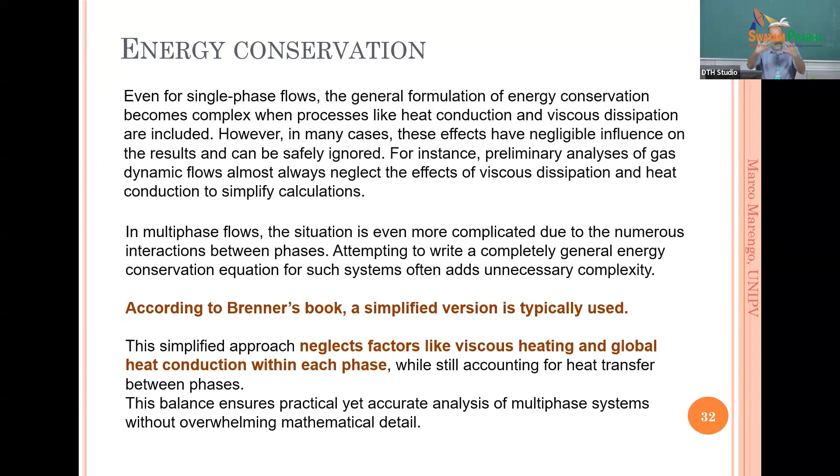So, when we have evaporation or condensation, this means that when we have evaporation, we are going to transport energy from one component to the other one, right? Because we have a mass. We transport momentum, but we transport also energy. So things are fine, but we should also consider other factors, because we talked about the viscous dissipation.

So one component is acting and producing shear stresses on the other component. But this viscous dissipation means also viscous heating. Okay? This is becoming complex. Or we may have heat conduction from one component, from one phase to the other. Okay, so we have heat transfer from one phase to the other.

It's not like what we wrote before, that we have a heat flux coming from, let's say, the walls, like in the single phase. But here, bubbles may have a different temperature with respect to the liquid, or the droplets may have a different temperature with respect to the gas, and so on.

Imagine, for example, having a spray of a liquid at, let's say, 40 degrees, 50 degrees, inside air at 20 degrees. So we have transport of mass, we have a mass interaction term, and we have energy because of the difference of temperature. Okay? So things are becoming, again, complicated because we have different conditions.

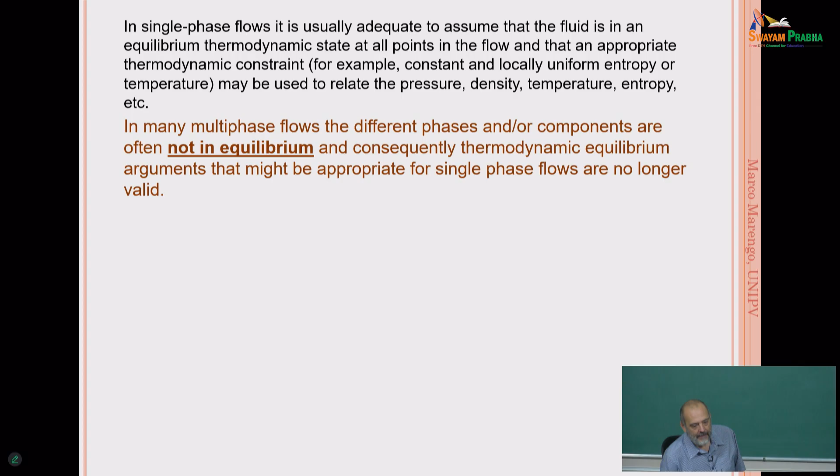So another point that is very important to say, and this answers one of the questions during the break, is: pay attention that the system is not in equilibrium anymore. So we are stretching the assumption that the system should be in equilibrium. Imagine having boiling, okay? Or a phase change in general.

So you have boiling, and you are considering the system at a given pressure. Yeah, but locally, in time, the pressure is not the pressure of the system. It's changing because of the boiling itself. So in fact, what is happening is that the system itself, locally and instantaneously, is not in equilibrium.

We are stretching the properties in a way that, we need to define the pressure, fine, so we put the pressure. But in fact, it's quite complex, and it becomes even more complex if you would like, for example, to simulate phenomena like flash atomization, as I said yesterday, with negative pressure and so on. So it's becoming really complex, what is happening.

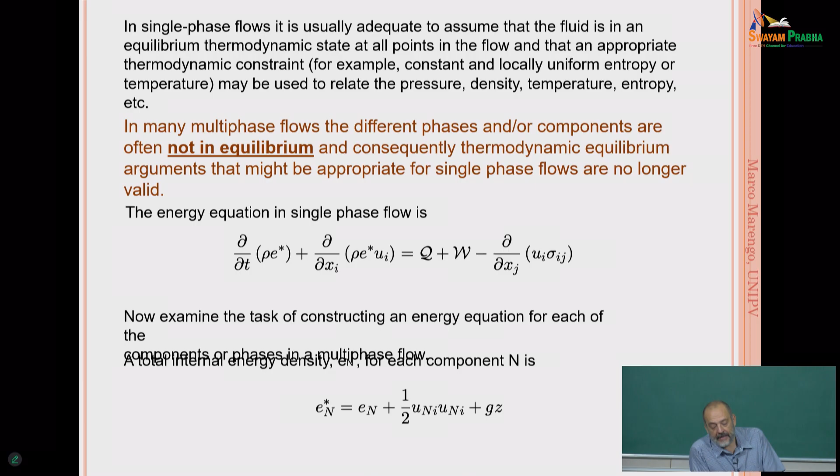So if you look at the energy equation in a single phase, this is what we have done before. Okay? So first of all, we need to write this equation for when we have different components. In the case of different components, we have a component n. We can write the total energy, of course, with the subscript n. That is, we can write this equation for the component n.

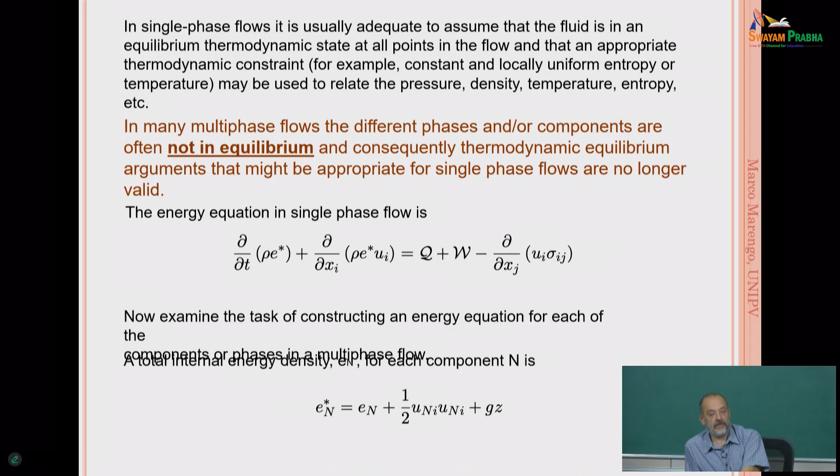Until now, it's fine. Which kind of energy equation do we need to write? Okay, so in words, and then we need to translate into mathematics. We have the rate of heat addition to n from outside the control volume, what we have done before. So we have a wall that is heating the liquid or the gas, or both. In this case n is one of the phases. Then we have the rate of work done to n by the exterior surroundings. Gravity, external forces, fine, no problem.

Rate of heat transfer to n within the control volume. This is becoming a little bit more complex because it depends on the other phases. Plus the rate of work, not heat anymore, done to n by the other components, because we may have drag. So then this is becoming complex. And this is equal to the rate of increase of the total kinetic energy plus the net flux of the total internal energy, because of course we are going to change the condition in terms of the energy.

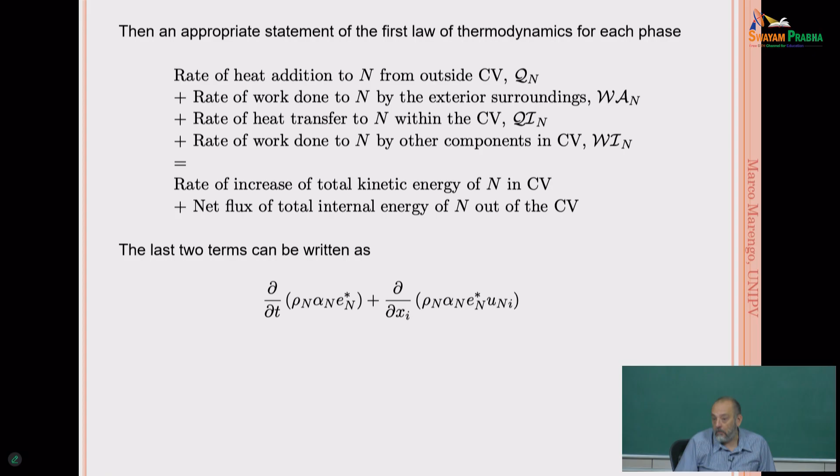So these terms are very clear. We can write the last two in this way if we consider the component n. And this is straightforward because it's the same equation that we have for the single phase, only that it is for one component. The other one is a little bit more complex. The first one is the external heating. Not difficult. It's a Q. It's a power that we are giving to the system.

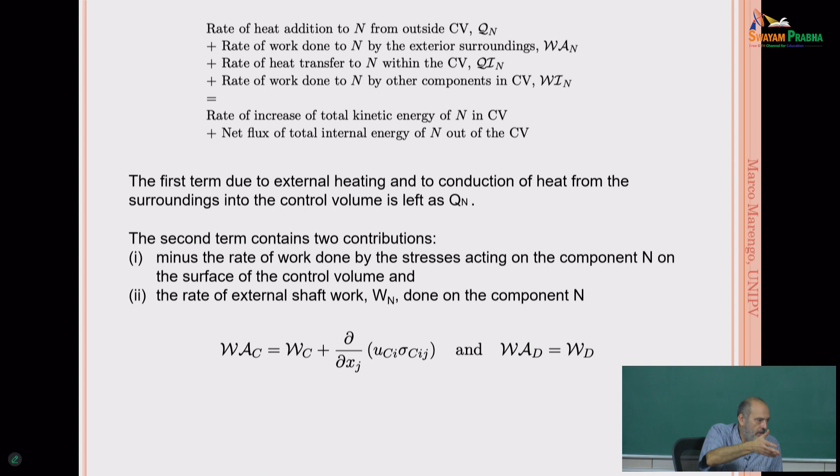The second one is the work done to n by the exterior surroundings. Yes, it's okay, but then we are going to have stresses along the component, which is fine, and maybe we have the shaft work. But again, this is classical. We have the shaft work plus the stresses, sigma. So again, it's nothing unusual. It's something that we can understand.

Then we have the three contributions that may be trickier. One is the heat that is coming because of the evaporation, boiling, condensation. So it's linked to the mass interaction term, QIN. And then we have the stress, the viscous dissipation due to the other component, and we are calling it WIN. Okay? And then we are going to have all the stresses of, let's say in this case, the

continuum phases. Okay? So, of course, again, as we have done for the mass, the sum over all the components of QIN is equal to 0, because inside the control volume, the liquid is giving energy to the gas, and vice versa, but at the end, this term must be 0. Same thing for the work, and of course, same thing for the internal exchange of energies.

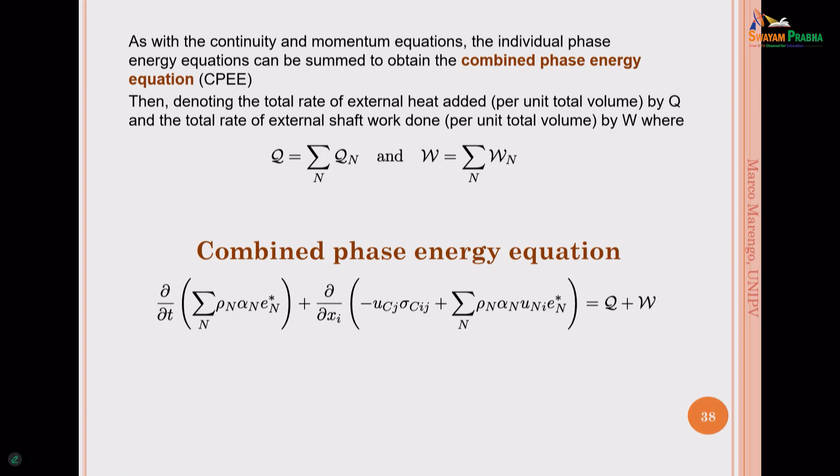If we have a two-phase system, of course, one contribution is just equal to the other one with the minus sign. So what the liquid is receiving from the gas is equal to what the gas is receiving from the liquid, and so on. So at the end, if we put all together and we sum up, we land with this combined phase energy equation, okay? Which is the equation that says how it works when having more than one component.

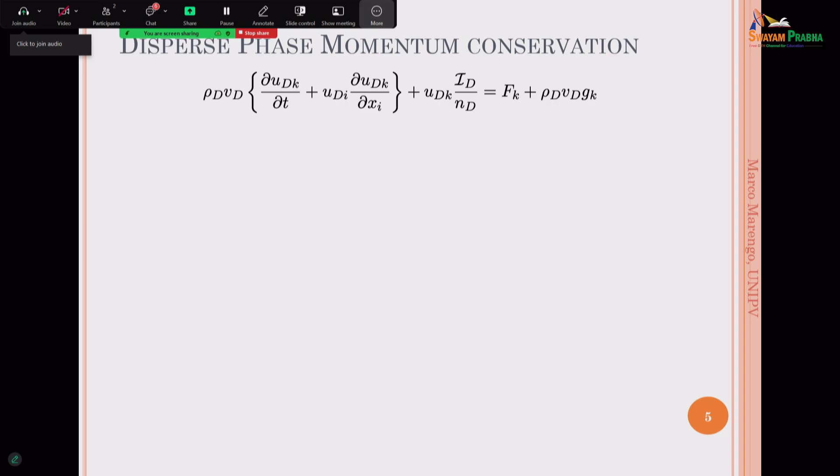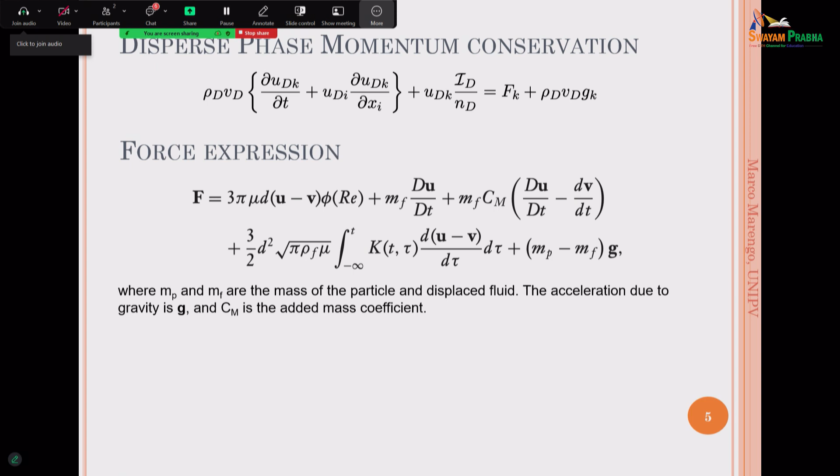Let's pass to the second, because now we need to enter a little bit more. So, look at this equation. We already said something that is very important: to define the forces, okay? Someone asked me during the break, how is the force? How is the coupling between one component and the other? This is a classical force expression, for example, when we have two components, for example, particles inside the fluid.

So, what is this? It seems complex, no? Because, of course, there are many terms that usually we don't have. You can recognize at the end the bulk force, the G, the gravity, like we have written before. So no problem. But there are other terms that are really more difficult to understand. So the first term is the Stokes drag. This is the force linked to the fact that we have a drag inside, as we have seen before. For example, this is a drag felt by solid particles inside the gas or the liquid, and the Stokes drag can be written in this form.

It's 3 pi mu, so the viscosity, and then we have the dimension of the particle, u minus v, multiplied by a factor that can be written, for example, with this equation that is linked to the Reynolds: 1 plus 0.15 Reynolds to the power 0.687. So this is the usual form. And of course, this Stokes drag is linked to the relative velocity of a particle with respect to the flow.

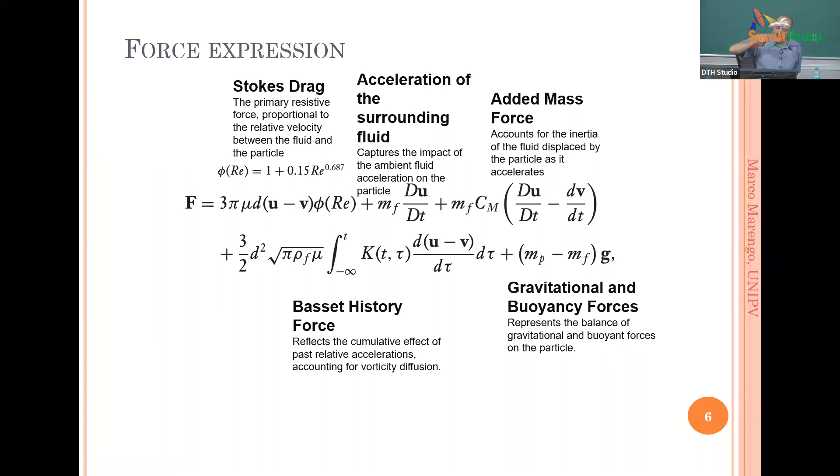And the form is that we have 3/2 d squared multiplied by the square root of rho f, the density of the fluid, multiplied by viscosity, pi. And then we have an integral from the beginning, let's say, to a given time. Then there is K(t - tau), the so-called kernel, and then there is a derivative of u minus v. So the effect is not like the du/dt before. It is the derivative in time of the relative velocity. So it's the relative velocity that is creating this kind of vortex.

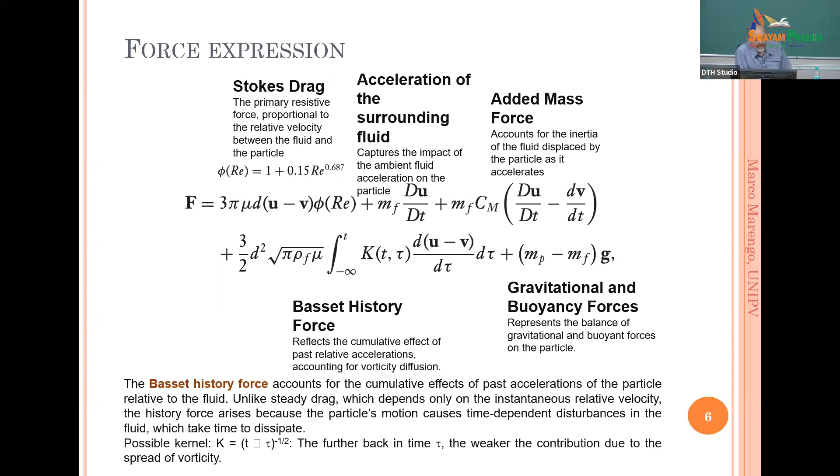One can ask, what is the difference between the Stokes and the Basset force, okay? The Stokes drag depends on the instantaneous velocity. So at a given time, you have a difference between the gas and the particle velocity, and this creates a viscous dissipation. Okay, the drag. The other one, no, because it's not depending on the instantaneous velocity. It is the acceleration with respect to the relative velocity. So you don't have u minus v, but the variation of u minus v in time that is producing the drag.

And this kernel, at t minus tau, if you are going very far back in time, becomes very weak, in the sense that if you go back a lot of time before what is happening, the influence is very low. It's important to know what is happening maybe a few seconds or milliseconds before, not what is happening 1 hour before.

So this is about the force. Now we need to understand a little bit more about the heat transfer, okay? When you are heating up a particle or a droplet or a system in general, you have a characteristic time that is linked to the conductivity or convection, but also the thermal inertia, rho Cp of the system. So this is the characteristic time of heating or cooling of a particle, a droplet, a bubble, and so on. So again, when we transfer energy from one phase to another, we can transfer energy by conduction, convection, and radiation. As I said yesterday, we are not considering radiation, okay?

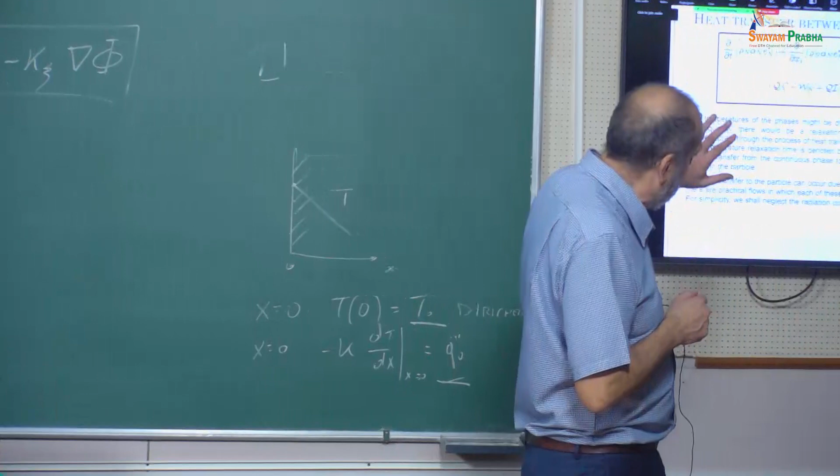Okay? It's a course. It's not 1 hour. But only to give you the idea of what is happening. So we are writing this equation for the chemical species, and we need a closure equation saying what is happening to one species with respect to the other because of the chemical reaction. So it's becoming quite complex.

If you are reading a paper with combustion simulations, you understand why maybe there is 1 page of equations. Because if you start writing all the equations in the proper way, it's really very complex. You have all the possible combinations. If the velocity of a particle with respect to the flow, so the relative velocity, is quite small, of course the dominant mechanism is conduction. Forget about radiation for now, but it's conduction.

So about radiation, one can think, okay, it's only for combustion. It's not only for combustion because, for example, imagine to have very, very hot metal particles. So you produce, let's say, a metal spray, plasma spray, and so on. So you have particles at 2000 Kelvin, something like that, entering the gas. Of course, radiation becomes important, even without a chemical reaction in this case.

The point is that radiation becomes important because, depending on the gas that we have, the gas can be transparent or almost transparent, and this means that there is a transfer from one particle to another, because in different positions you have different temperatures of the particles. Understand? So radiation there becomes very important because the temperature is very high.

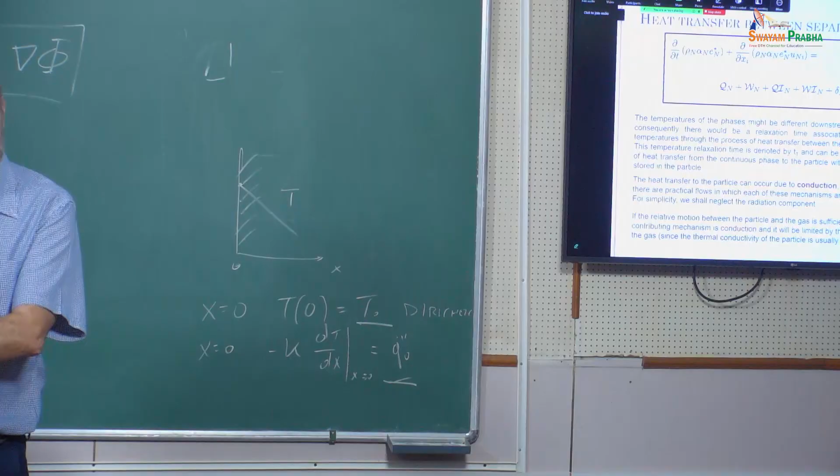Okay, only to say, because I was thinking, now I'm saying only chemical reaction, but it's not only combustion. It can be something like that also, thermal spray. Simulation of the thermal spray is considering also radiation. Now, for this, we are not considering it, because it's, again, another level, okay? And we are not considering chemical species.

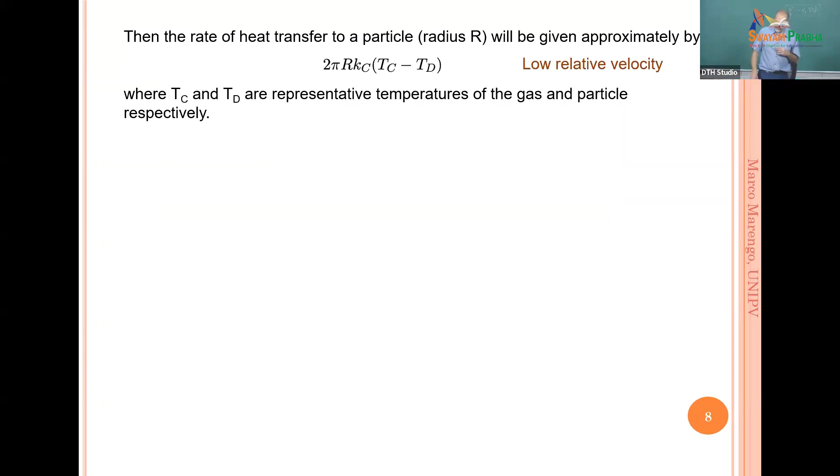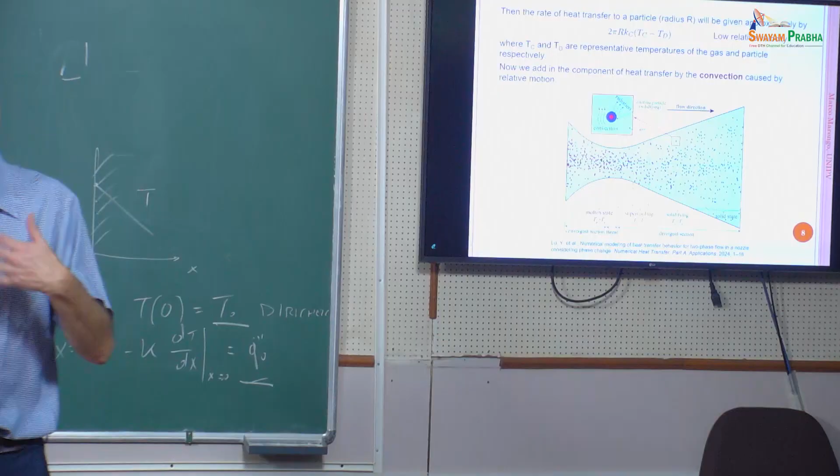But when the relative velocity is low, we can have this kind of expression that says how much is the exchange between the particle and the gas. When we have convection, things are getting complex. For example, I took this example because it's 2024, and again, multiphase flows is quite complex, and you see that we are doing research. It's a field of research. It's not something that is established and everything is fine.

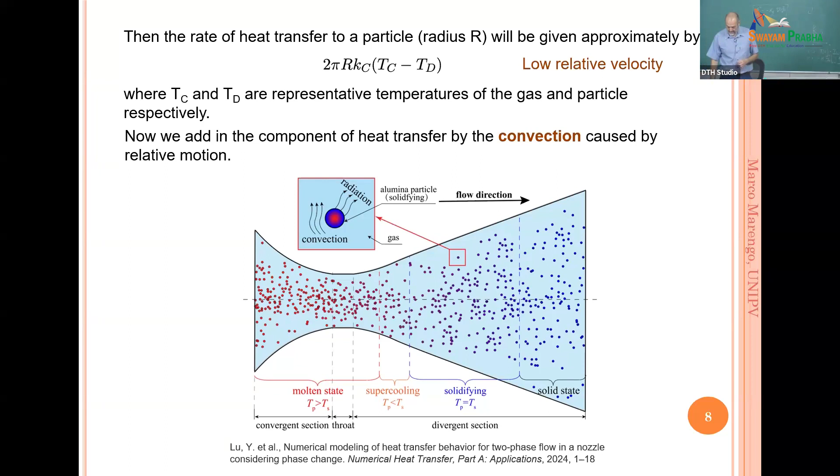So, for example, if we have a nozzle like that, and we are producing particles, and the particles are molten, are liquid metal, for example. It's going inside the nozzle like that, so convergent, divergent nozzle. So we are going to have a flow, and then we have different phase changes. We can have a solidification at the end. We are producing solid particles. And of course, in this case, we have convection and radiation. Only to tell you that it can be quite complex.

So a very simple way is to consider, for example, the interaction between the droplet and the gas, or droplet particles and the gas or a liquid. And again, we can come back with the relation that I showed you before with the Nusselt number, where the Nusselt number was a function of Reynolds and Prandtl. So we can incorporate this kind of relation in order to calculate how much is the heat that is going from one phase to another.

So the question is what we wrote before, but then we need to understand how we can calculate these relations. Again, on Thursday we are speaking about numerical methods, and I'm going to tell you how we can deal with the different aspects, because there are different ways to solve the problem. One is considering the dispersed flow, each one, for example, when we are doing a VOF simulation of a spray, okay? So we are really going to understand at the interfaces, each one, what is happening. Of course, in terms of computational time, it is very, very long, because we need to consider the single droplet.

Another way is to consider the phase of the droplets in a kind of parcel, okay? So we are putting some droplets with the same diameter together. This is another way to solve these problems, okay? Now, today I'm giving you the general overview. Then of course, we are going to write the closure equations, because we need to understand how to deal with the different terms. But this will be on Thursday.

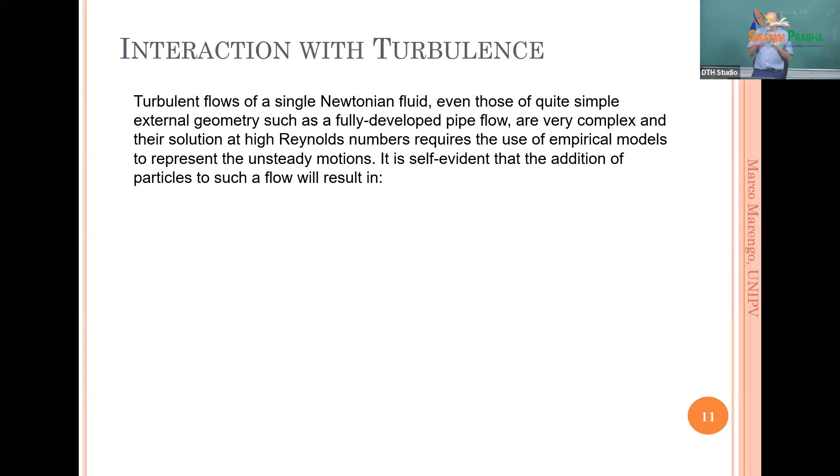Let's put away something that is too complex for this course, non-Newtonian fluids. Newtonian, okay? Viscosity is the same. Put away situations where you don't have fully developed flow, so you have a nice condition. Again, we don't want to enter into the details, okay? Good.

Because when you're dealing with complex, unsteady motions, for example, when you have a pump and you're considering variation of the rotation of the pump, so variation of the pressure and so on, you may have segregation. So the particles, like what we saw before, can create structures. We can have particles that are going to the walls and so on. Unsteady motion. Particle agglomeration, or coalescence of the droplets or the bubbles. So the droplets can coalesce, the bubbles can coalesce, and so on. So it's not changing the mass of the component, but it's changing the quantity in a given volume.

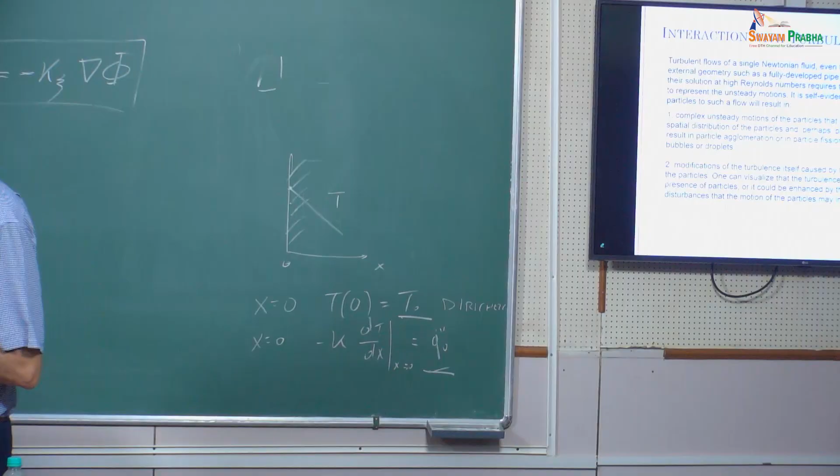Okay, so this is, of course, to consider. Okay, the particles in all the multiphase flows are having an effect on turbulence. This is the point. I said already, no? Okay. Now,

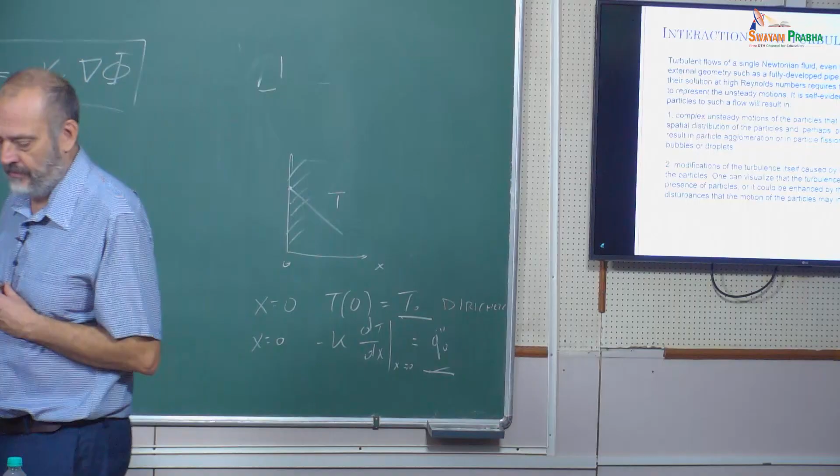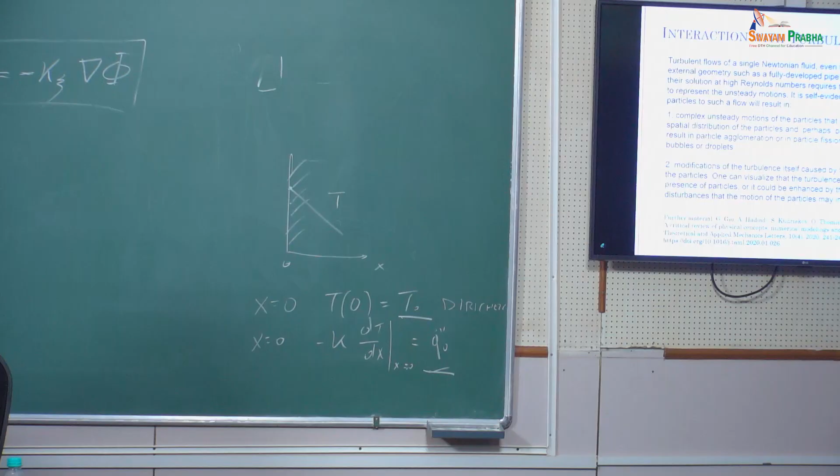if you want to study a little bit more this part, I put a paper that I enjoyed. It's particle-induced turbulence. So it's the turbulence induced by the particles. So you have a laminar flow. You put inside droplets or bubbles and so on. You are going to have local turbulence.

So you have a nice flow. But you put bubbles inside, like even a slug plug condition, like in a pipe. So you have bubbles going, everything is laminar. Wow, it's very good. Yeah, but behind the bubbles you have a wake. The wake is producing a vortex, and you may have a kind of turbulent situation. So then, of course, there is an influence.

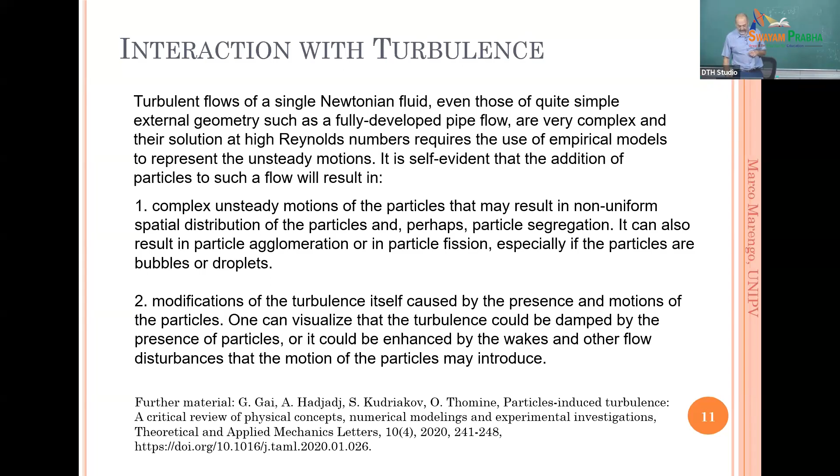Okay, so this is a critical review of physical concepts, numerical modeling, and experimental investigation. It's 2020, so it's quite recent.

So imagine a spray. So you are injecting a spray, and you have gas that is going to be entrained in the spray, because the velocity is higher here, so the pressure is lower, so you have gas from the environment that is going inside, and then you are creating vortices inside, even if the air was completely still at the beginning. So, completely still, we are injecting the sprays, we are completely changing the motion with a lot of vortices, so we are creating turbulence.

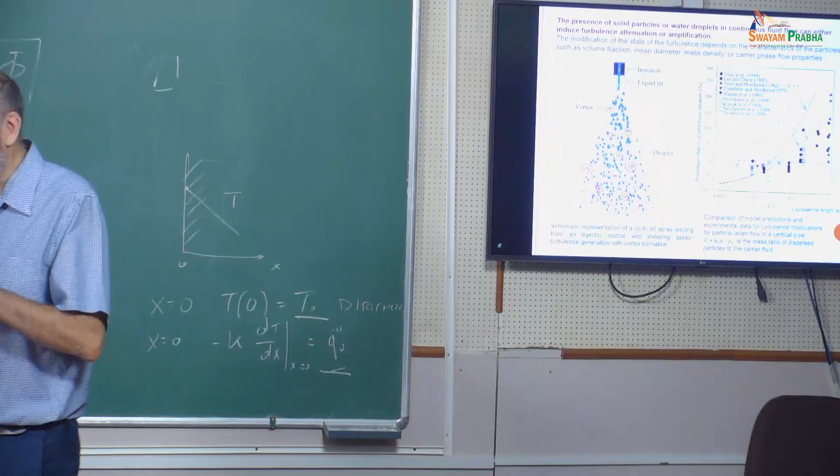And the turbulence can even, let's say, at the beginning, if it's completely unsteady, create a situation where we can change the condition of the spray, or let's say of the atomization.

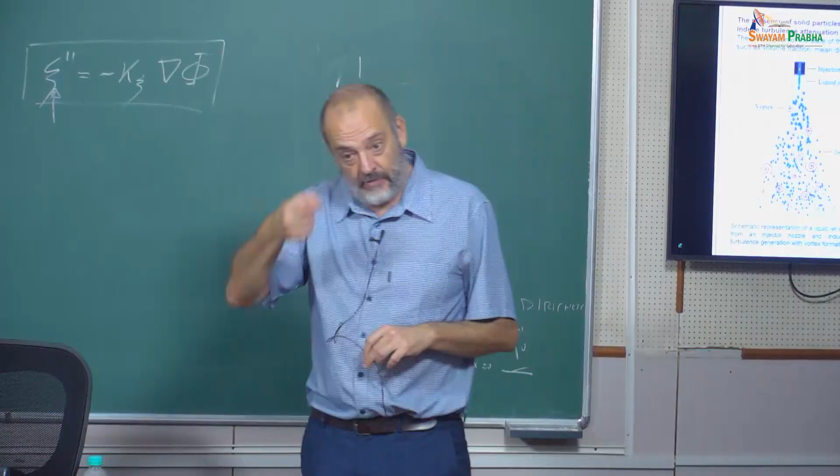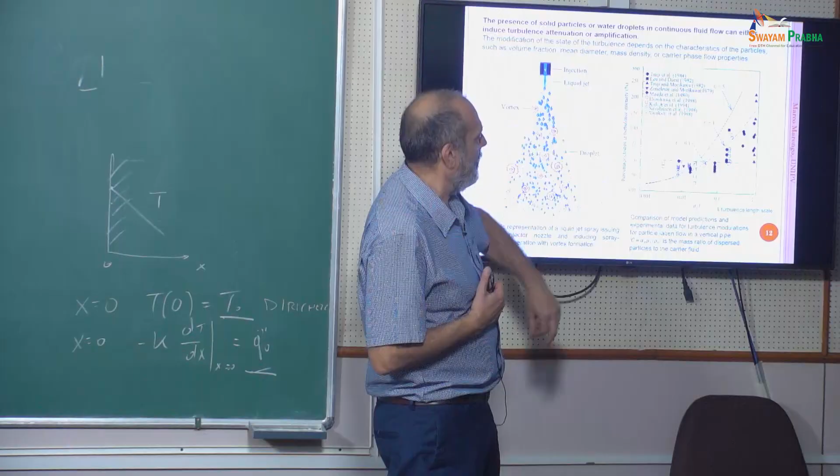And for example, if you look at the second result here, that is in the paper that I cited, this is the dimension of the particle with respect to the turbulence length scale, the lambda, no? And here is the percentage change in turbulence intensity, okay? So, as a function of alpha p rho p over rho f.

And as you can see, there are different data that are a little bit scattered. So this means that even with experiments, it's not clear what is happening. It's very complex. But it's very clear that we have an influence. And the influence also depends on the dimension of the particles.

And even think about the fact that if the particles are not spherical, it's even more complex because we also have rotational mechanisms. So, for example, if we have sticks, strands, and so on, these strands can evolve, and then, of course, they can completely change the local turbulence again. So the system can be quite complex.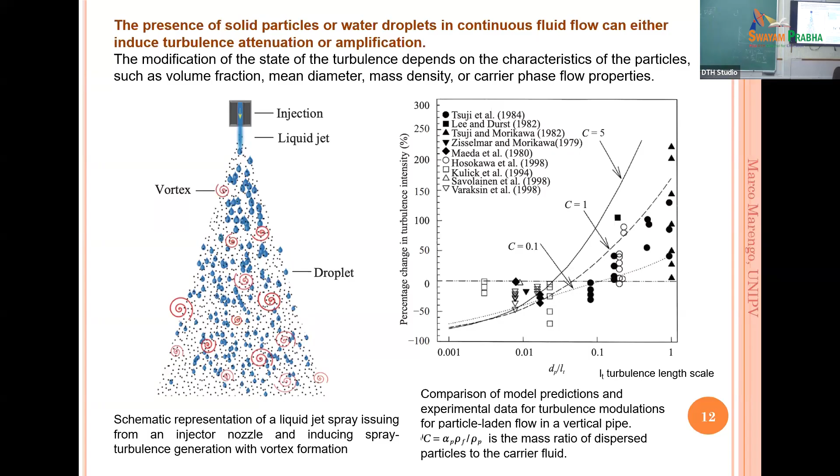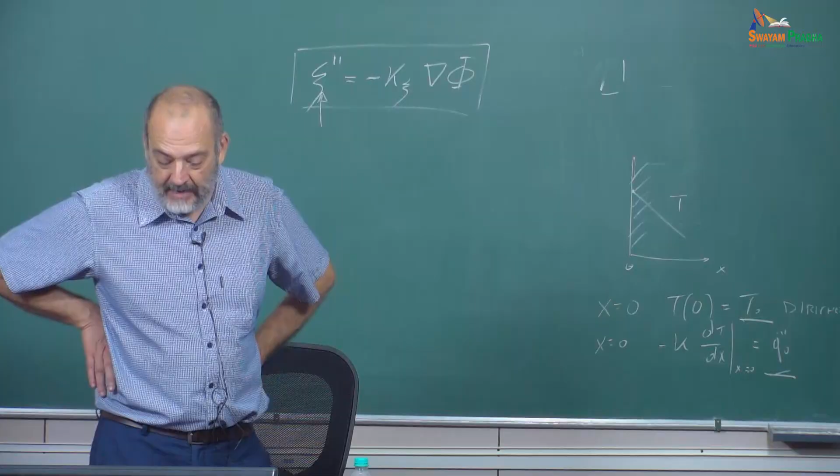So there are 5 key factors that are, let's say, explaining what is happening. One is the so-called surface effects. It's the particle size normalized by a length scale. So this dp over lt. Then we have inertial effects. So we have the different velocities for the particle and the continuous flow.

We have the response time, the particle response time, or the so-called Stokes number. Maybe I can say something later on. Which is also very important, because it's the response to a change of the flow velocity, so the acceleration. Loading effect, how much is the quantity of particles inside, and the interaction effect, because we also have particle-particle collisions, and we have particle-wall, and so on.

Okay. LT is the turbulence length scale that can be written in terms of K and epsilon. And this is quite useful because, of course, K-epsilon, for example, is a classical model to describe turbulence in numerics, so we can use these values. Where K is the turbulent kinetic energy, and epsilon is the dissipation rate. And then there is a constant, which, for example, for the K-epsilon turbulence model is 0.09.

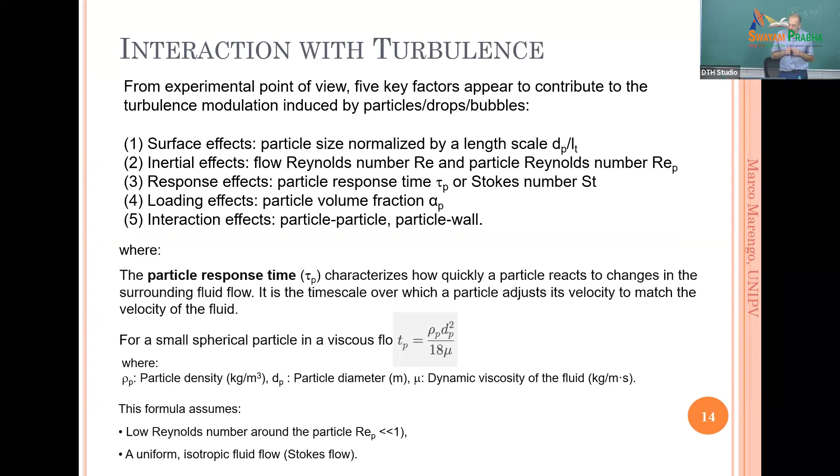The classical response time is rho of the particle, the density of the particle, multiplied by dp squared, divided by 18 times the dynamic viscosity.

Look, if we consider alpha, the volume fraction, this is an interesting graph from Elghobashi. So it's true that below a given value of the volume fraction, so when we have very few particles, very few, okay, there is no significant effect. There is an effect, but it's negligible. There is always an effect. But this effect is negligible below a given value, alpha p, okay?

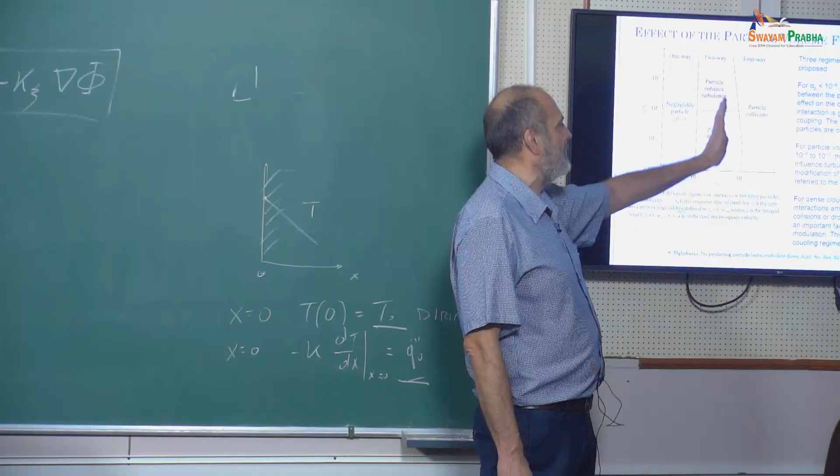After, we have a second region where we are going to have more particles inside, and we have the so-called two-way coupling regime. So, in fact, there is an influence from one component to another. However, depending on the particle response time and the turbulence time, we may have the situation where the particles are enhancing the turbulence, and the situation where they are attenuating the turbulence.

Okay, so if the response time of the particle is small, we are going to have this effect of attenuation of the vortices, because in fact the particles are following somehow the flow. Imagine that you have some turbulence and the particles are entering the vortex and following the vortex. Since you are adding a mass to the vortex, you are slowing down the effect. So you are dispersing because you are creating stresses, smoothing down the turbulence effect.

But on the opposite side, if the particles are going inside and they are not following, but they have a little bit more inertia, they may be stretching the vortex, creating even more vortices. And so they are increasing the turbulence level, not decreasing it.

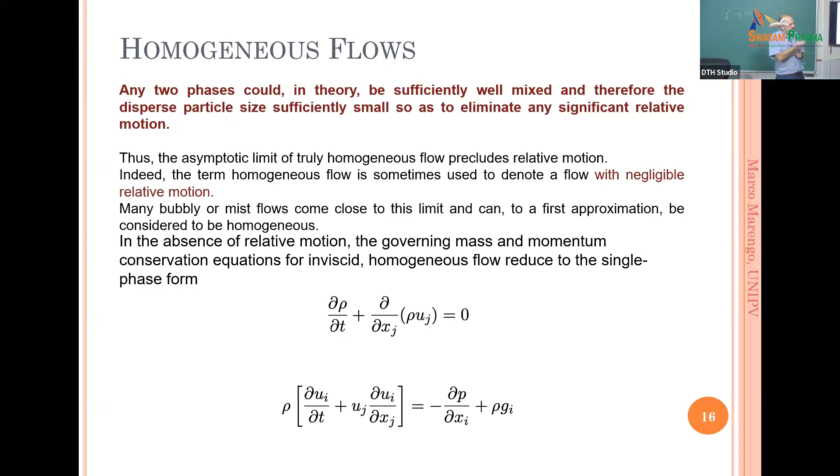As I said, homogeneous flows are very important because in this case we can treat the multiphase flow as a single phase flow, and this is quite useful. What is important is that the relative motion of one component with respect to the other is negligible. What is changing are the properties, like the viscosity, and we need to put an average viscosity. Of course, if we have a lot of small particles, this is going to change the average viscosity of the system. But we can survive with this.

One thing that is interesting is that not only the viscosity changes, but another property, interesting for compressible flows, is the velocity of sound. This is changing with the presence of the particles inside. This is the sonic velocity as a function of particles inside the system, and this is interesting to know.

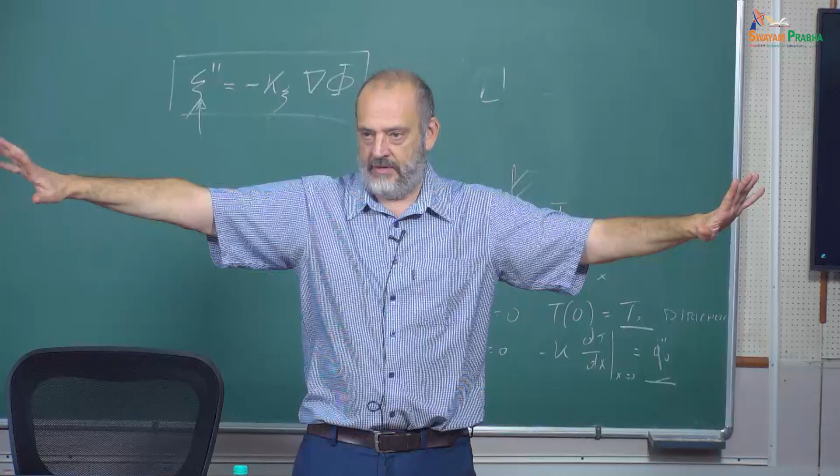But again, in a homogeneous condition, the density is becoming an average density. So in a homogeneous flow, when we have a lot of small bubbles or small droplets, a classical example is the aerosol. Aerosol means having very small droplets, under 5 micrometers, in a flow. They are following the flow. So we can use the volume fraction to define the average density of the system, the average heat capacity, the average viscosity, and so on.

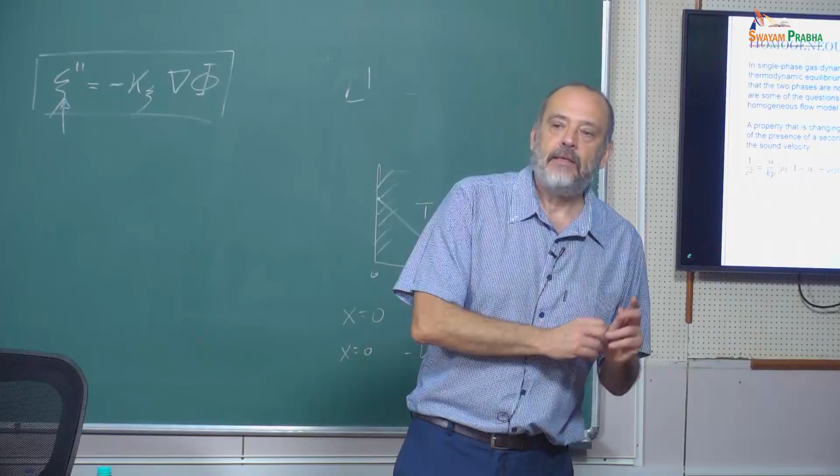In this case, even with a compressible flow, you have an average of the density that is giving the correction for the sonic velocity. What is interesting is that the sonic velocity of a mixture is much smaller than the sonic velocity of one of the components. So if you have, for example, an air and water bubbly mixture, the sonic velocity is much smaller than for the water and for the gas.

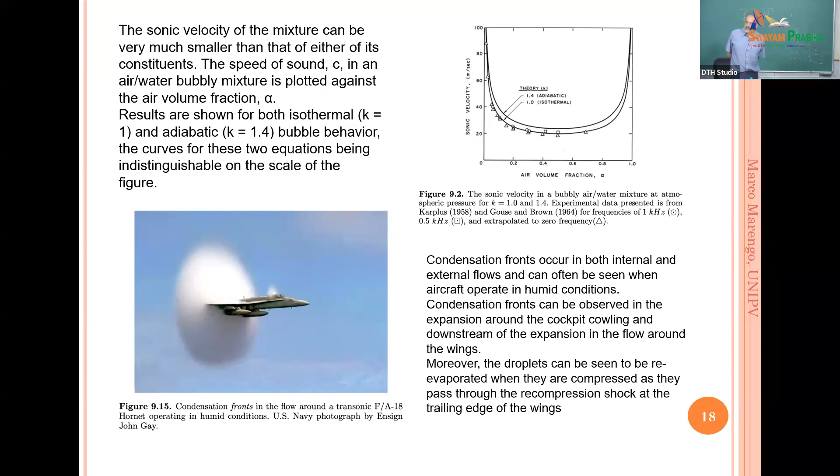And here you have, for example, a condensation front. This is a very nice image from a shock wave produced by a jet. But it can be that we don't have a shock wave. It's really the fact that we have a front of high pressure, and this is creating condensation and producing droplets.

And then we have the sprays. This is a big chapter in multiphase flows, as you can understand. I'm going to come back to sprays a little bit on Thursday when we are dealing with interfaces, because I'm giving you this part as supplementary material. But what's important to say is that we didn't consider until now the surface tension.

Of course, when we are dealing with liquid, we are dealing also with the surface tension, okay? But on Thursday I'm going to speak about that. I'm going to define the surface tension, the effect of surface tension in the flow, and how you can incorporate this surface tension inside the equations, okay? Otherwise, it was too much for today. With drag and buoyancy and so on, it's already too much in 1 hour.

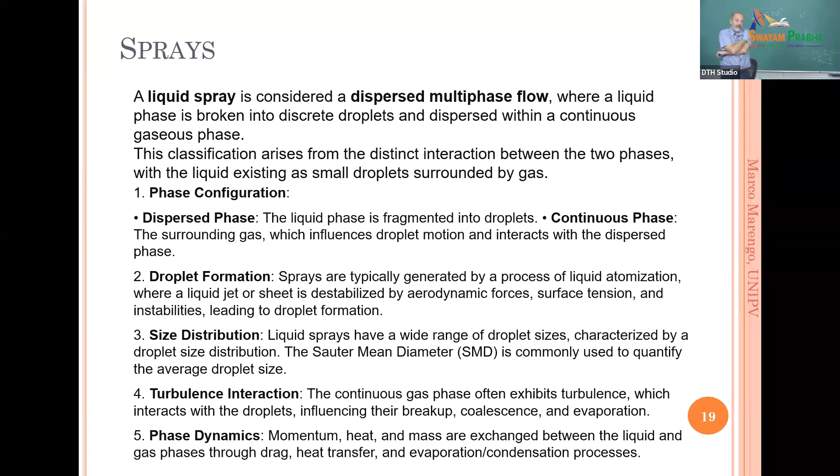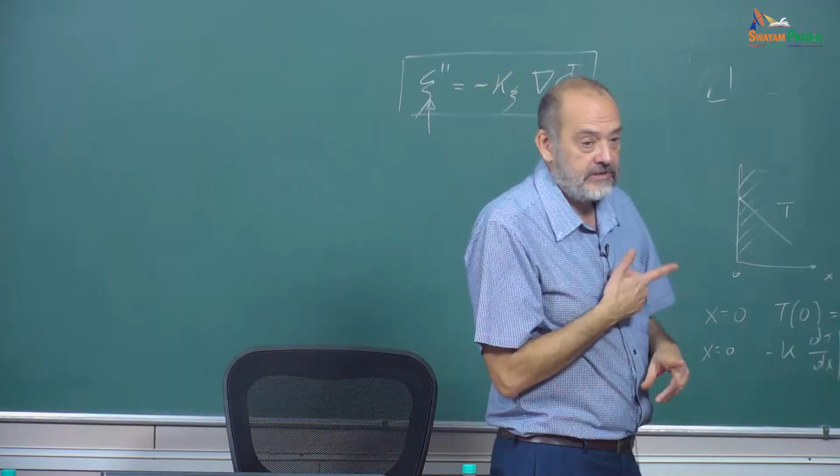So what is important is that we are going to explore the effect of the surface tension. Of course, in liquid sprays, the surface tension effects are very important, and sprays are really very complex. They are dispersed multiphase flows, maybe reacting sprays, meaning with combustion, for example, and it is one of the most difficult simulations that we can think of. We have evaporation, condensation, coalescence, we have everything. If you start thinking of a spray, you can put everything inside. And for the dispersed multiphase flows, it can become really very important.

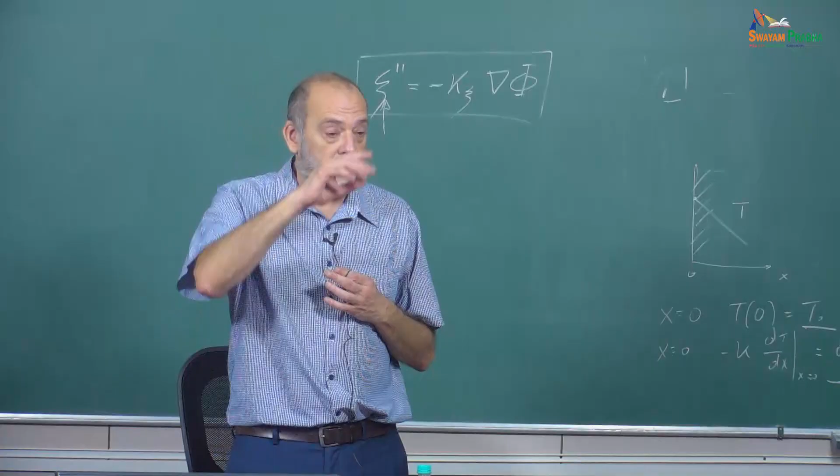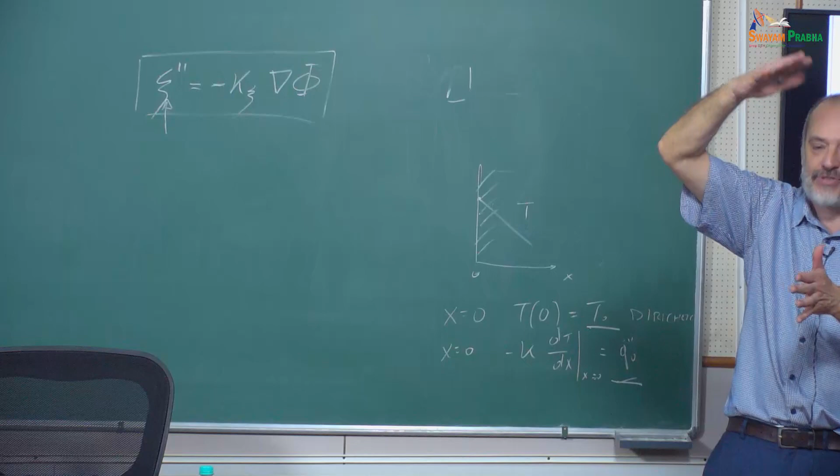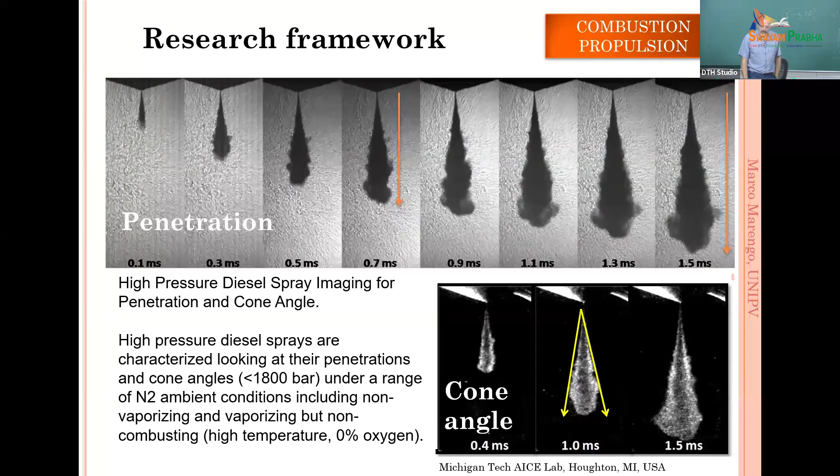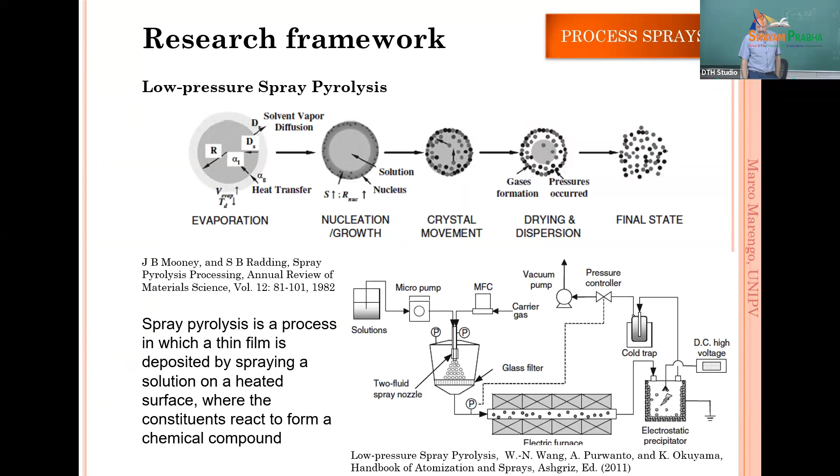Also because, another point, the droplets may have different diameters. We wrote the equation with a D, but imagine that now we have not only one D, but a distribution of diameters in the spray. So it's becoming really very complex. But of course, it is a field that is very important for combustion, propulsion, spray drying. We have many industrial applications that are related to sprays, electrosprays.

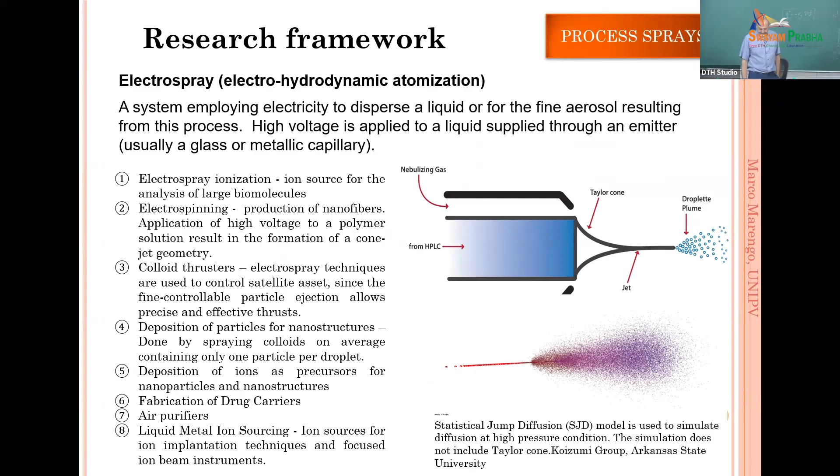Here, I put this example because it is an example at the nano level. So how to produce nanoparticles, very small particles. Painting. And here, for example, is interesting. My colleagues at the University of Stuttgart, I know them since a long time.

Imagine that in 1998, I visited the research center of Daimler-Benz in Ulm, and the guy, his name was Chris Angad, was the head of one department of the research there, and he was thinking, maybe we can simulate the entire process of painting the car. Okay, it was in 1998, with the computers at that time. But he had this idea, maybe we can do something. In fact, in Stuttgart, they are working a lot on this topic.

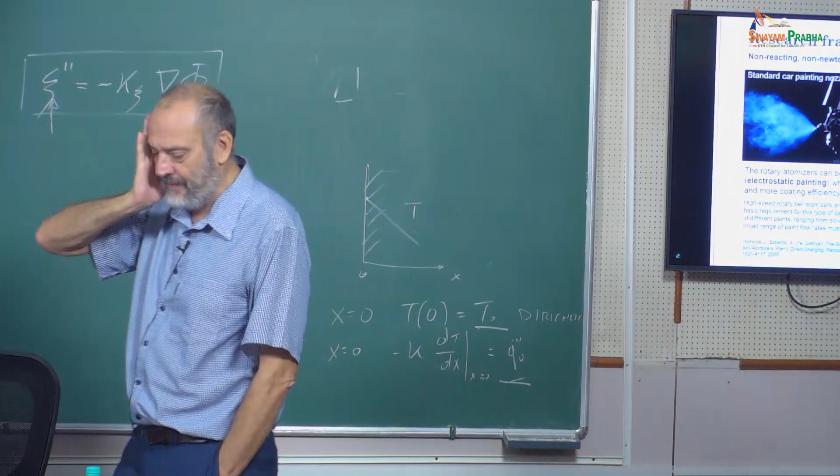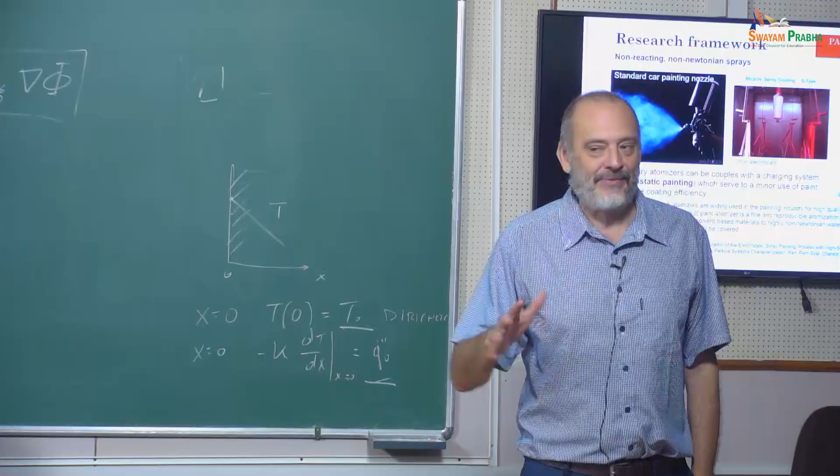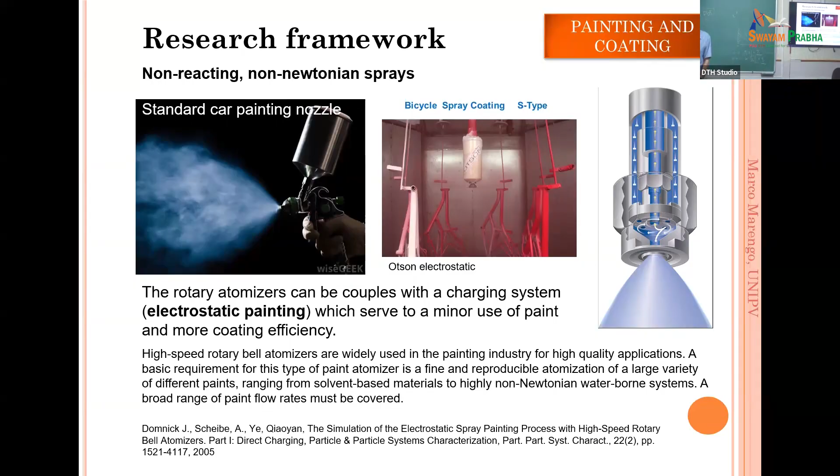And here, for example, we talked about the force. Well, we have another external force. When we're speaking about electrostatic painting, we are thinking about the effect of charges inside the spray. Because the spray is charged, we have an extra force to consider in the equations. Usually, if you consider this, then you need to simplify something else, because otherwise it's becoming too complex, but it's interesting to know. This is an example where the force is not only G. There is another force acting, the electrostatic force.

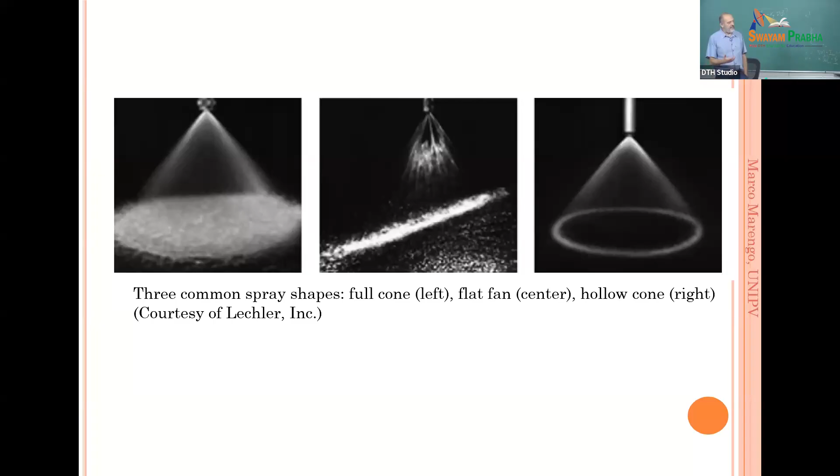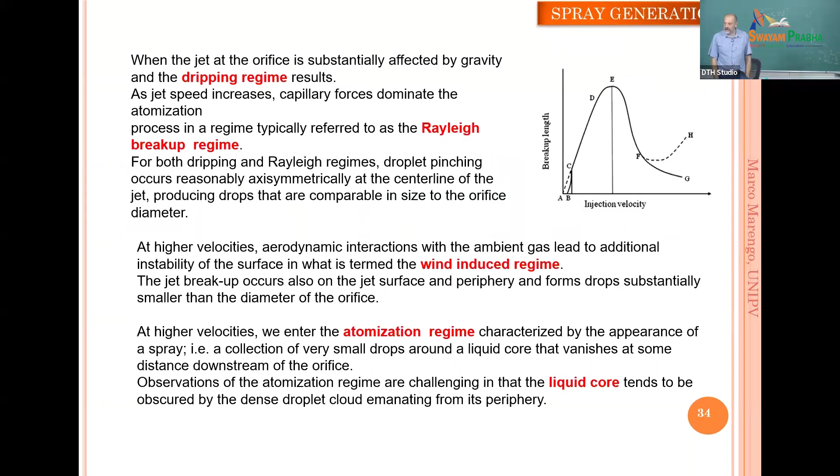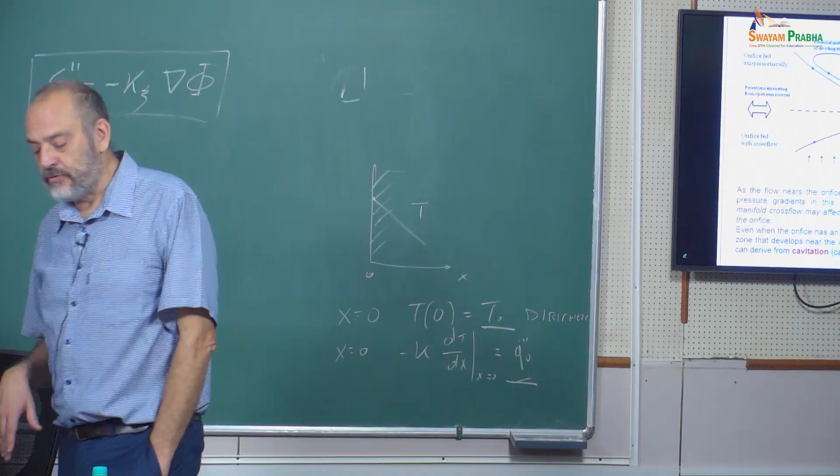Also here, for example, in a nozzle, you may have cavitation inside the nozzle. So again, you have another effect. And I finish with this sentence: imagine that until 10 years ago it was almost impossible to have a simulation of sprays from the nozzle to the final effect. The simulation of a spray was what is inside the nozzle, and then we started with a given situation at the nozzle and propagated the solution to understand the cone angle, the droplet movement in space, and so on. But it was very difficult to put the two things together. Now we are doing this.

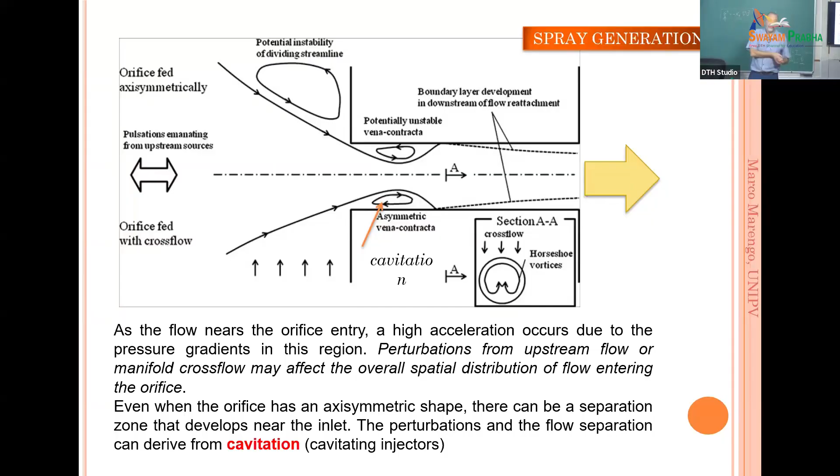Now we are able to have the CFD simulation starting from inside the nozzle, maybe with cavitation, intermittency, and so on, producing the jet at the end with a breakup. It can be an aerodynamic breakup, instabilities, and so on. But it's really very recent. We are not speaking about 50 or 40 years ago, but about 10 years ago.